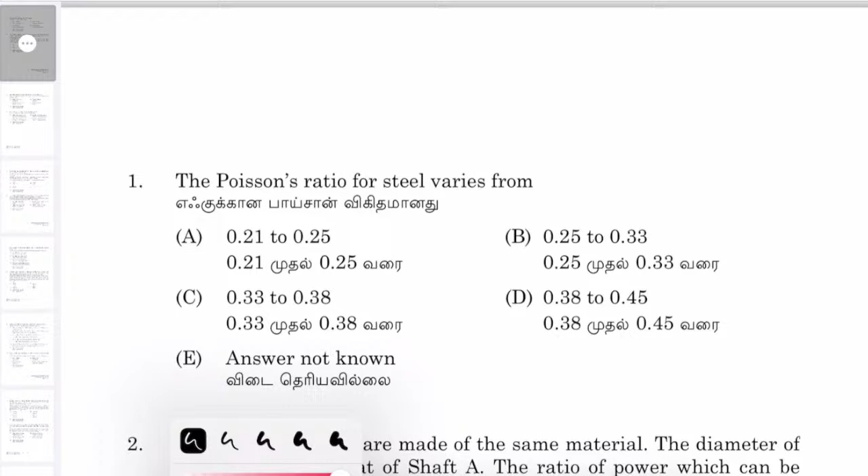So second question, two shafts A and B are made of same material. The diameter of shaft B is twice that of shaft A. The ratio of power which can be transmitted by shaft A to that of shaft B is option C. So third question, maximum principal stress theory is known as option A, Rankine's theory.

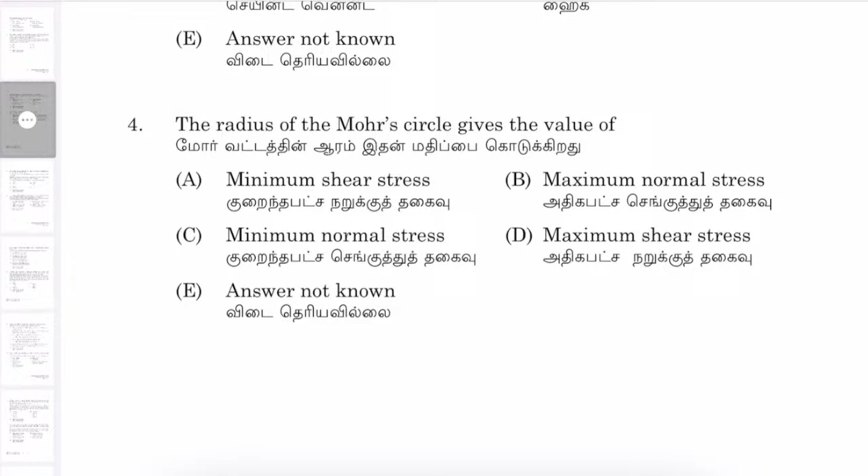So fourth question, the radius of the Mohr circle gives the value of option D, maximum shear stress. So fifth question, the tensile stress in the flywheel rim due to the centrifugal force acting on the rim is given by option D, rho v square.

So sixth one, if a sliding contact bearing is designed for 3 times the minimum value of bearing modulus, then the bearing will operate with option D, thick film lubrication.

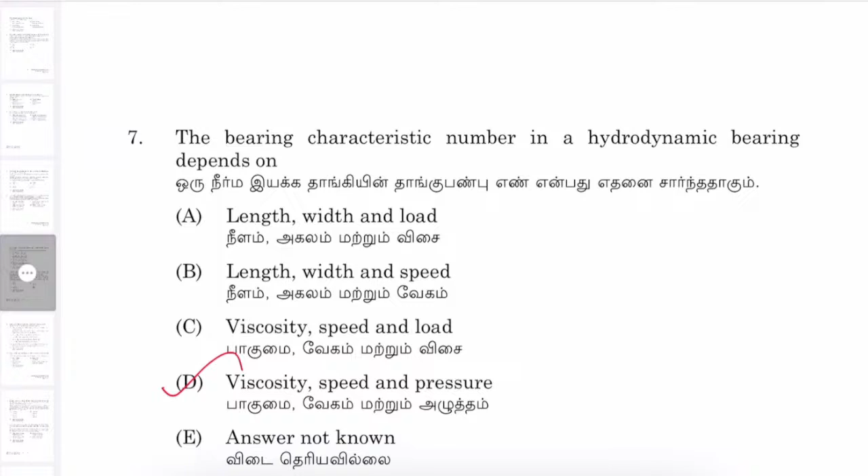So question 7, the bearing characteristics number in a hydrodynamic bearing depends on option D, viscosity, speed and pressure. So eighth question, a double fillet weld joint with parallel fillet weld of length L and leg B is subjected to a tensile force P.

Assuming uniform stress distribution, the shear stress in the weld is given by option C, P divided by root 2 B into L.

So ninth question, which of the following statement is wrong for connecting rod? Option D, the most suitable section for the connecting rod is T section - that is wrong.

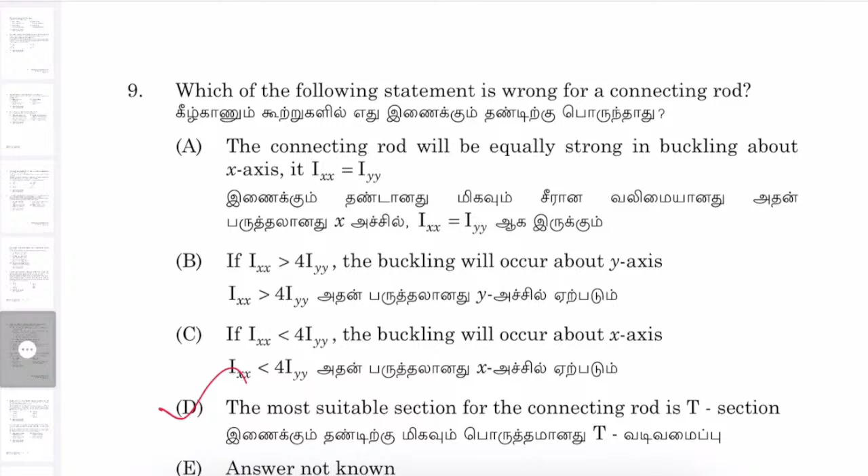So 10th one, when the frictional force helps to apply the brake is said to be option D, partially self-energizing brake. So 11th question, 20-degree full depth involute profile, 19 tooth pinion and 37 tooth gear are in mesh.

If the module is 5 mm, then center distance between the gear pair will be option A, 140 mm. So 12th question, when bevel gears having equal teeth and equal pitch angles connect two shafts whose axes intersect at right angle, then they are known as option D, miter bevel gears.

So 13th one, two threaded bolts A and B of same material and length are subjected to identical tensile load. If the elastic strain energy stored in bolt A is 4 times that of bolt B and the mean diameter of bolt A is 12 mm, the mean diameter of bolt B in mm is option B, 24 - that is the correct answer.

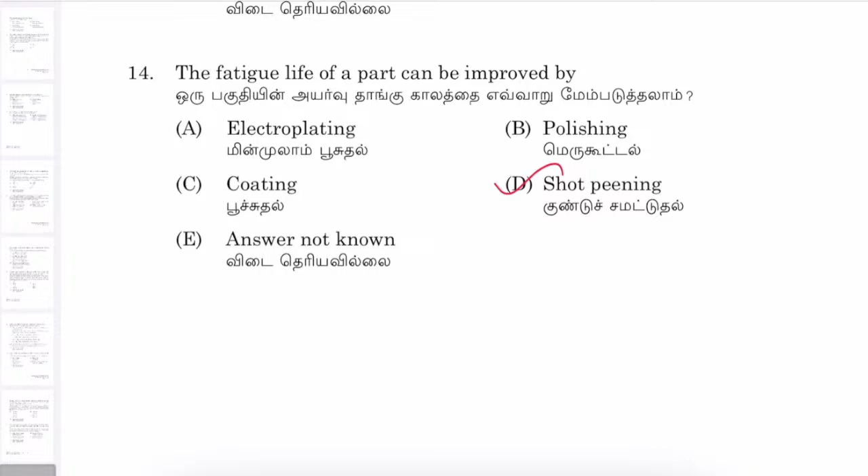So next question, the fatigue life of a part can be improved by option D, shot peening. So next one, Oldham coupling is used to connect two shafts

of option B, which have lateral misalignment. So next question, Euler's formula to calculate buckling load is given by option A, PC is equal to n pi square EI divided by L square.

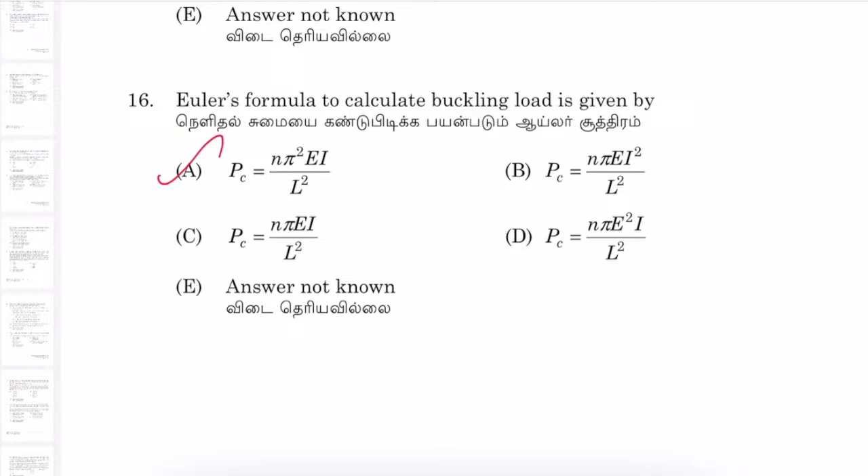So next question, a simply supported beam is subjected to uniformly distributed load in its entire span. The variation of bending moment along the length of the beam is option C, parabola.

So next question, a boiler of 1.6 meter diameter is made of 20 mm thick steel plates. The permissible steam pressure is dash if the longitudinal efficiency and the circumferential efficiency of the joint is 80% and 70% respectively. The maximum tensile stress in the steel plates is not to exceed 80 megapascal. So option B, 1.60 Newton per mm square.

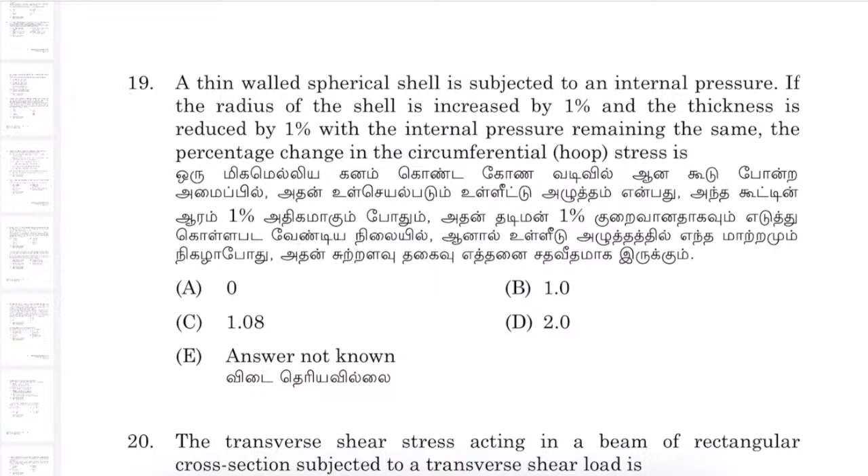So next question, a thin walled spherical shell is subjected to an internal pressure. If the radius of the shell is increased by 1% and the thickness is reduced by 1%, with the internal pressure remaining the same, the percentage change in the circumferential stress is option D, 2.

So next question, the transverse shear stress acting in a beam of rectangular cross section subjected to a transverse shear load, option D, variable with maximum at the neutral axis.

So next question, which statement is correct about unary phase diagram? Option C, pressure plotted on the vertical axis and temperature on the horizontal axis.

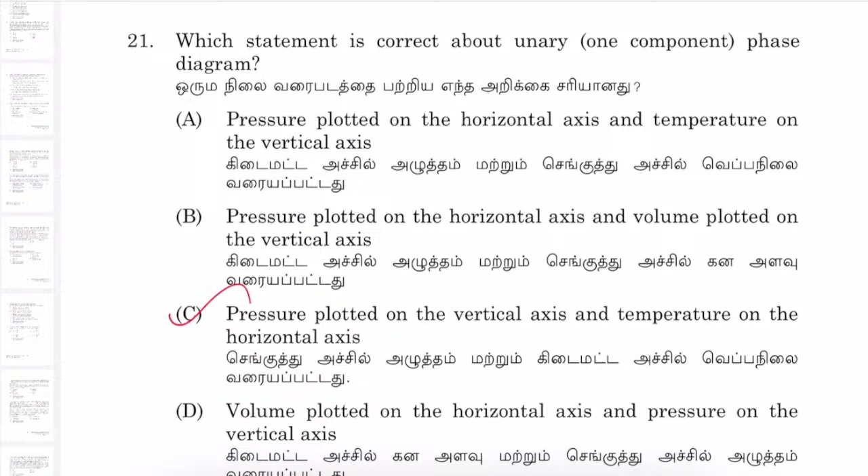So next question, a peritectic reaction occurs during the following process. So option D, solidification of some alloys.

So next question, the critical cooling rate is defined as option A, slowest rate of cooling at which all the austenite is transformed into 100% martensite.

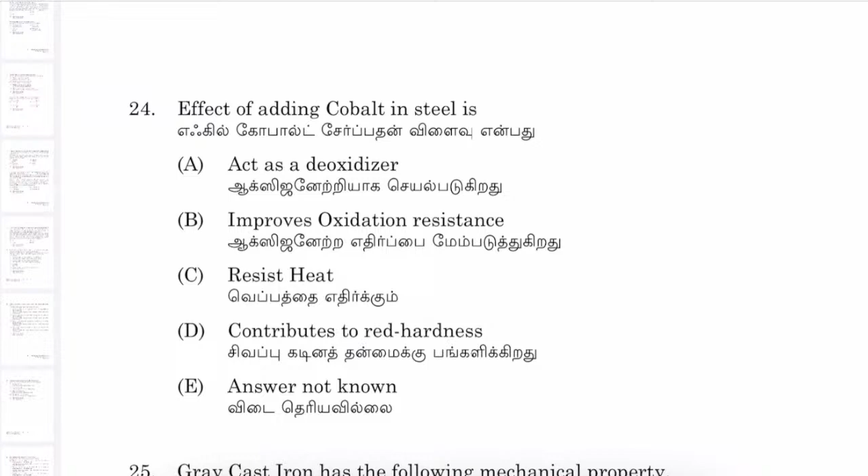So next one, effect of adding cobalt in steel is contributes to red hardness. So next question, gray cast iron has the following mechanical property.

Option B, low tensile strength. 26th question: the purpose of doing tempering treatment is to improve toughness. 27th question: high speed tool steel must possess excellent red hardness and good shock resistance. 28th question: normal crystallographic structure of nickel at all temperatures is FCC, option A.

29th question: which is used as lining material in high temperature furnaces? Option B, alumina. 30th question: which one of the following is a polymeric material? Option A, starch.

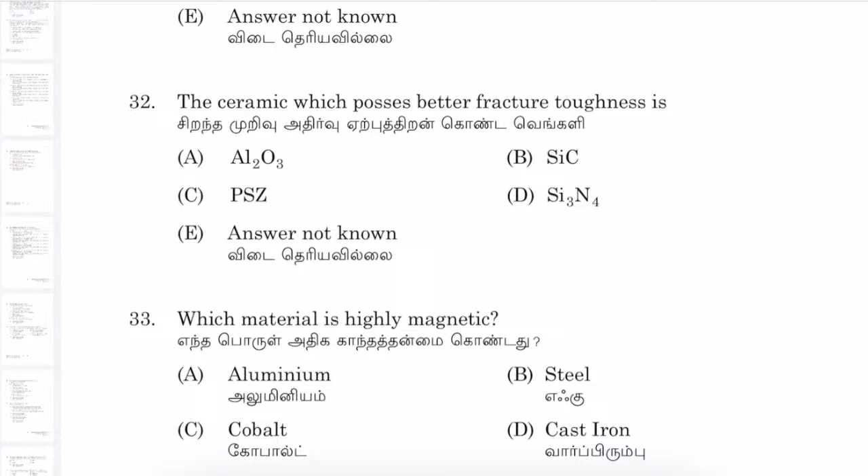31st question: which of the following is agglomerated structure? Option B, concrete. The ceramic which possesses better fracture toughness is option C, PSZ.

33rd question: which material is highly magnetic? Option C, cobalt.

34th question: an ion displaced from the lattice into an interstitial site is called option D, Frenkel defect. 35th question: zero dimensional imperfection is also called option D, point imperfection.

36th question: in particle strengthened system the particle size is usually option A, less than 0.1 micrometer.

37th question: which of the following is not an advantage of powder metallurgy? Option D, low production rate, is the wrong/incorrect statement.

38th question: in the stress strain curve the transition occurs at a point referred as option B, proportional limit. 39th question: the ability of a material to plastically deform in compression without fracture is referred as option D, malleability.

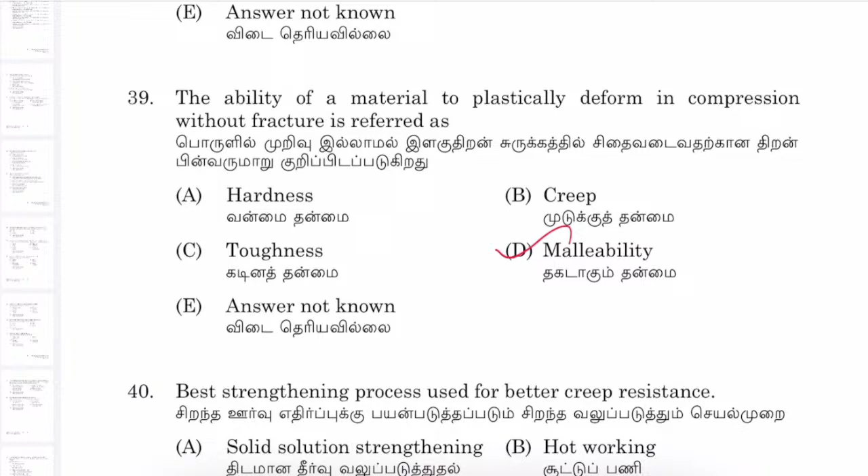40th question: best strengthening process used for better creep resistance? Option D, precipitation strengthening.

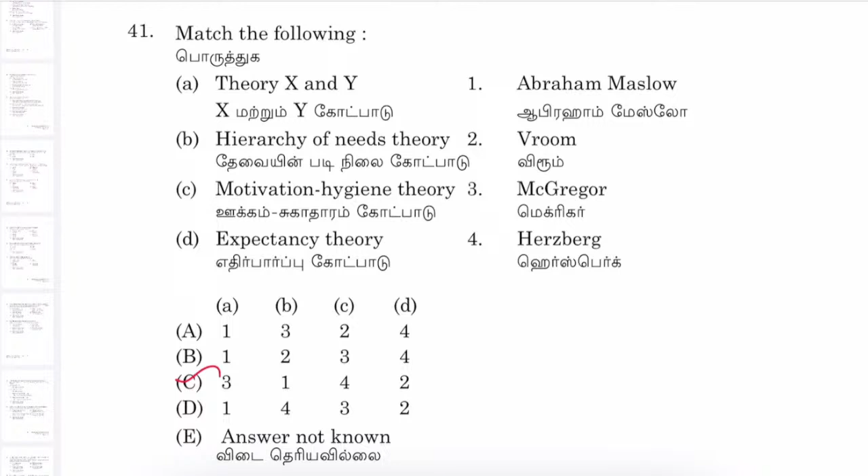42nd question: select the correct leadership styles. They mentioned laissez-faire, democratic, authoritarian, and symptomatic diagnosis. For us it will be laissez-faire, democratic and authoritarian, so option B is correct.

43rd question: the following personal protective devices can be used by the operator to protect the face during welding. The answer for 43 is option A.

44th question: a foreman or supervisor is a vital link between option B, management and worker. 45th question: which of the following is not associated with CPM? Option C, it uses probabilistic times.

46th question: in a CPM network the critical path is option C, shortest path.

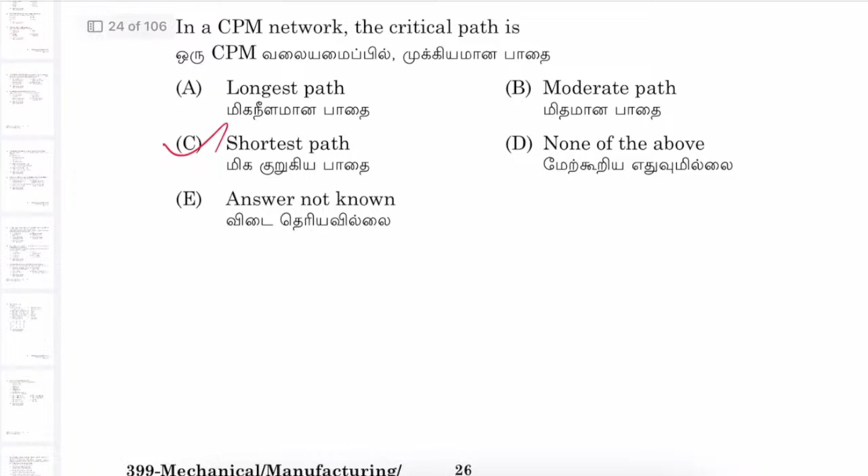47th question: the number of basic variables of the general transportation problem with m sources and n destinations is feasible if the number of allocations are... the answer is option D, m plus n minus 1.

48th question: if there are n workers and n jobs there would be a dash solution. The answer is option B, n factorial.

49th question: inventory carrying cost can be computed by option D, average inventory into cost per item into cost of carrying inventory in percent per period.

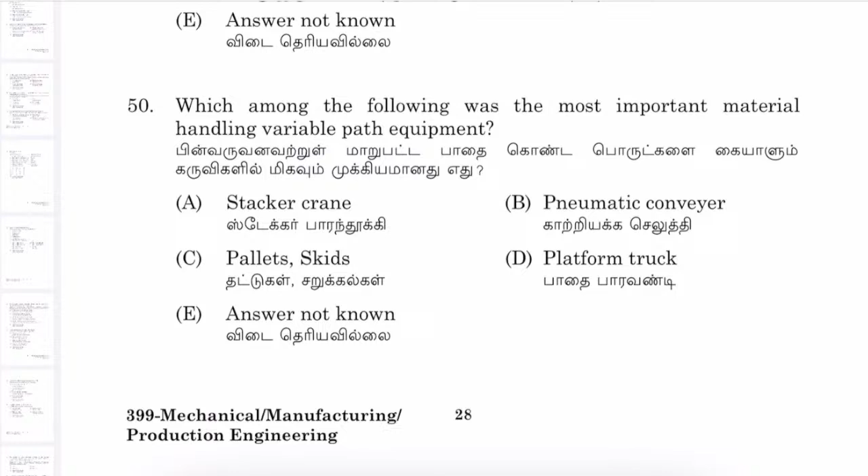50th question: which among the following was the most important material handling variable path equipment? The answer is option D, platform truck.

51st question: in ABC analysis the C items are those which represent option A, 5 to 10% total expenditure on materials.

52nd question: the material handling equipment that can be used to transfer material from one place to another place along the beam attached to the ceiling. The option is option B, monorail.

53rd question: which of the following is not considered a contingency allowance? Option B, checking the machine setting.

54th question: which study is concerned with the recording, analysis and critical examination of existing and proposed ways of doing work? Option C, method study.

55th question: in time study the formula to determine the number of cycles, what is the precision interval level in percent? The answer for 55 is option B, 1/4.

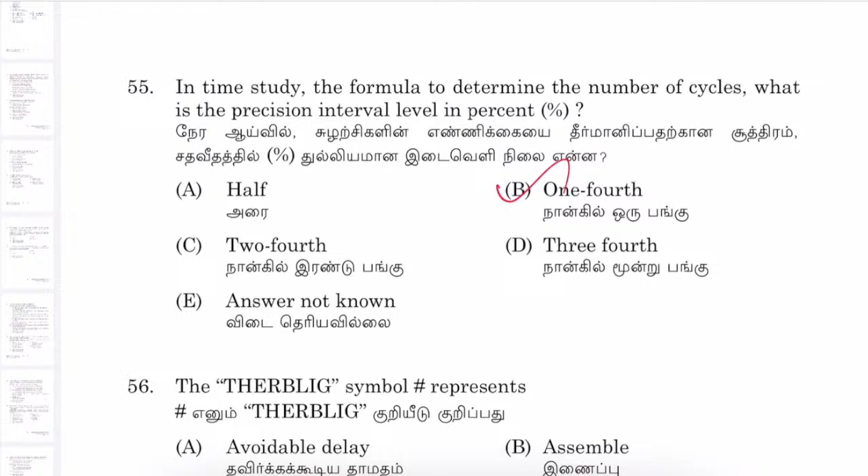56th question: the THERBLIG symbol hash represents option D, position.

57th question: unit of command is followed in which one of the organization? Option A, line organization.

58th question: which of the following skills are most important in human relations? Option B: leadership skills, motivating skills and communicating skills.

59th question: a manufacturer of motorcycles buys side box at rupees 240 each. If he manufactures it, the fixed and variable cost would be rupees 3 lakh and rupees 90 per side box respectively. If there is a demand for 2500 side boxes, the break even point is option A, 2000.

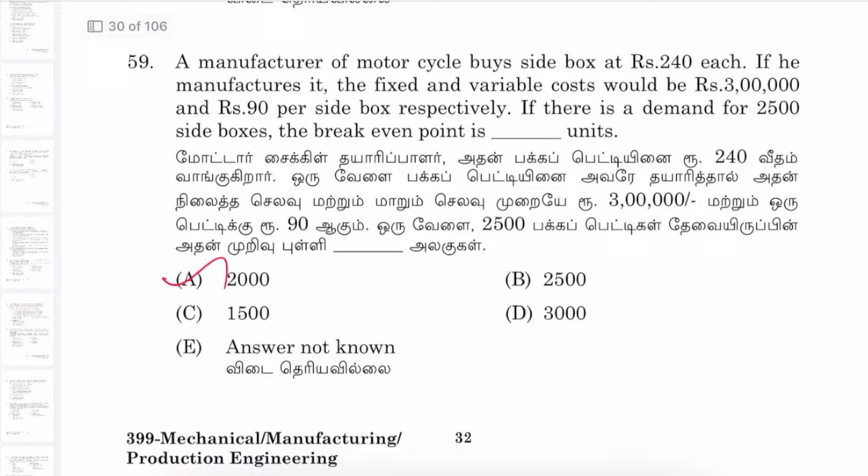60th question: according to Henry Fayol, the principles of management are option D, that is division of work, authority and responsibility, and remuneration.

61st question: for a pitot tube the stagnation pressure head is 6.8 meter, the static pressure head is 5 meter, CV is equal to 0.9 and g is equal to 10 meter per second square. Calculate the velocity and select the right option. The answer for 61 is option B, 10.49 meter per second.

62nd question: flow of water in a pipe having diameter above 3 meters can be measured by option C, Venturi meter.

63rd question: the ratio of forces exerted by water jet when it is made to strike a stationary flat plate held normal to it, and a flat plate moving in the direction of jet at 1/3 the velocity of jet, would be option B, 9:4.

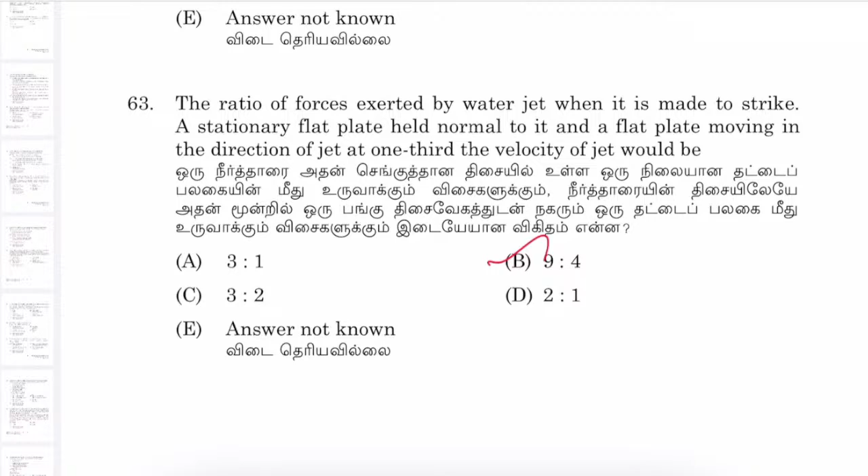64th question: efficiency of the jet of water having velocity v striking a series of vertical plates moving with velocity u is given by option B, 2u into (v minus u) divided by v square.

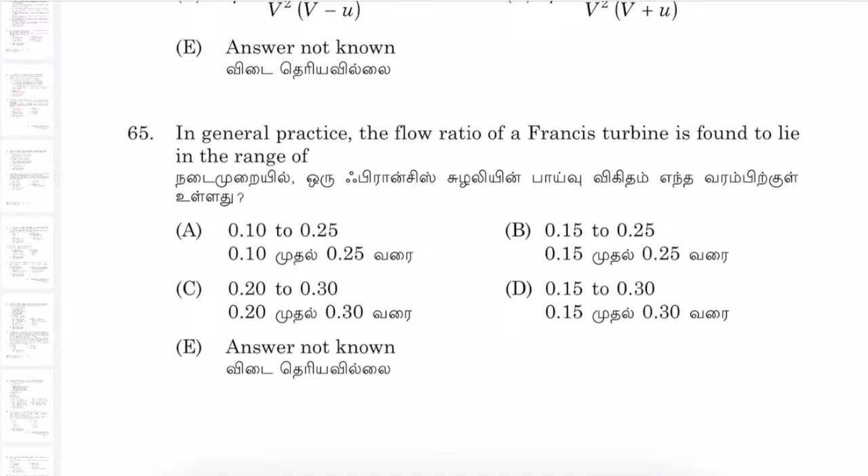65th question: in general practice the flow ratio of a Francis turbine is found to lie in the range of option D, 0.15 to 0.30.

66th question: the degree of reaction of a Kaplan turbine, option B, greater than 0 but less than 1/2.

67th question: water hammer in pipes is due to option C, sudden stoppage of flow by the closure of valve.

68th question: the modern Francis turbine is essentially option B, a mixed flow turbine.

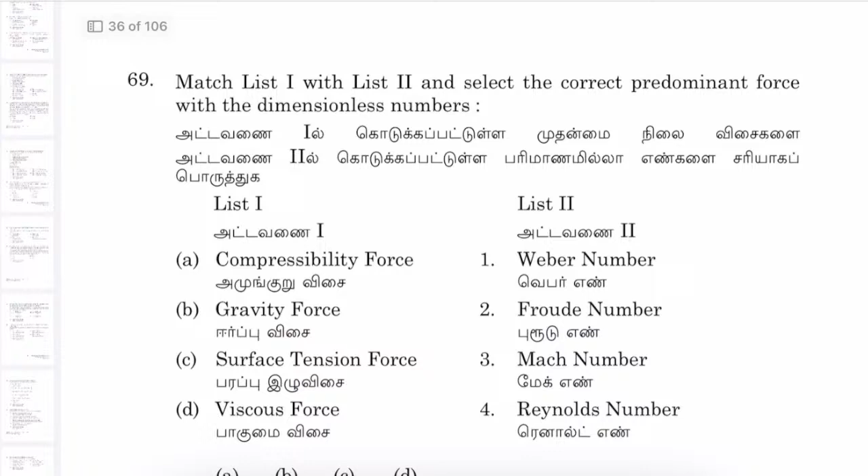Which of the following is not a dimensionless number? Option C, Manning's coefficient.

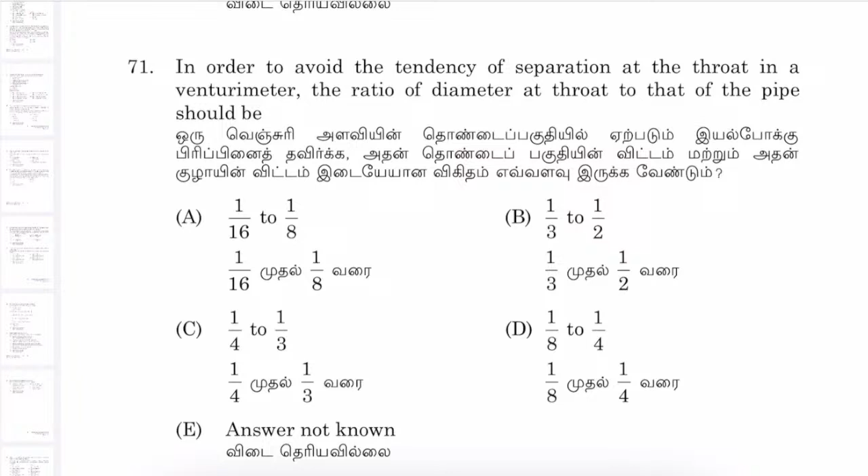71st question: in order to avoid the tendency of separation at the throat in a venturimeter, the ratio of diameter at throat to that of pipe should be option B, 1/3 to 1/2.

73rd question: loss of head due to sudden expansion of flow stream in a closed conduit is expressed by option A, (V1 minus V2) the whole square divided by 2G.

74th question: if H is the total head at inlet and HF is the head lost due to friction, efficiency of power transmission through a straight pipe is given by option A, (H minus HF) divided by H.

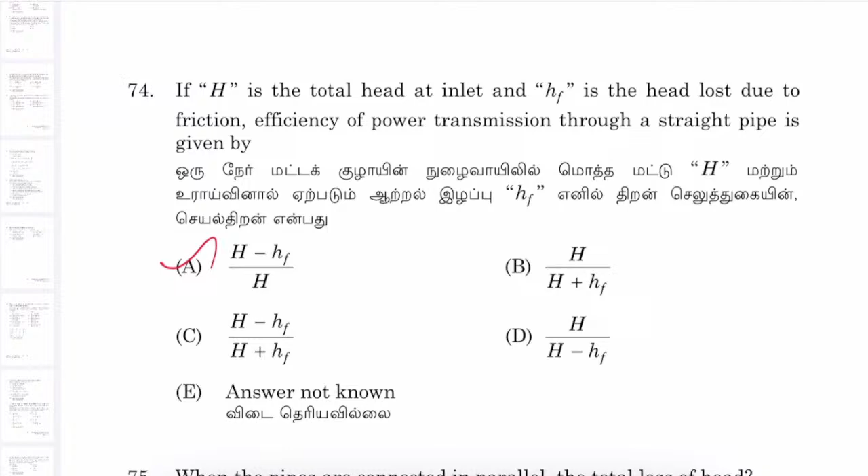75th question: when the pipes are connected in parallel, the total loss of head, option B, is same as in each pipe.

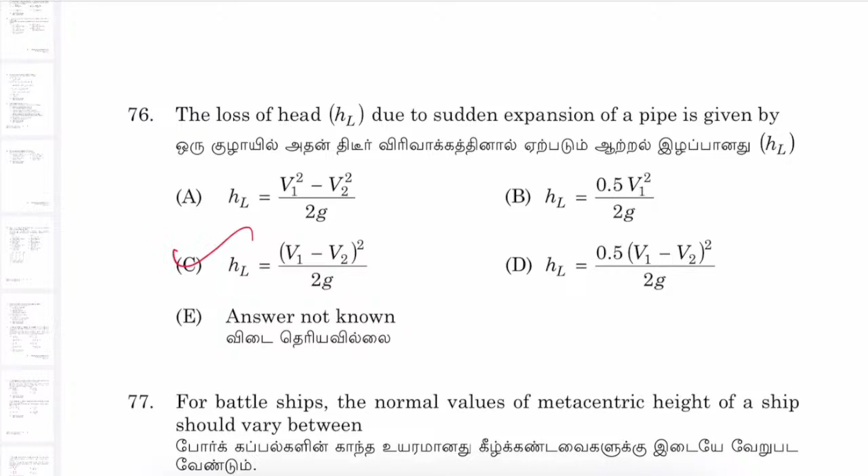76th question: the loss of head due to sudden expansion of pipe is given by option C, (V1 minus V2) the whole square divided by 2G.

For a battleship, the normal values of metacentric height of ship should vary between option C, 1 to 1.5 meter.

78th question: a metallic piece weighs 80 Newton in air and 60 Newton in water. The relative density of the metal would be option C, 4.

79th question: the least radius of gyration of a ship is 9 meter and the metacentric height is 0.75 meter. The time period of oscillation of the ship is option B, 20.85 seconds.

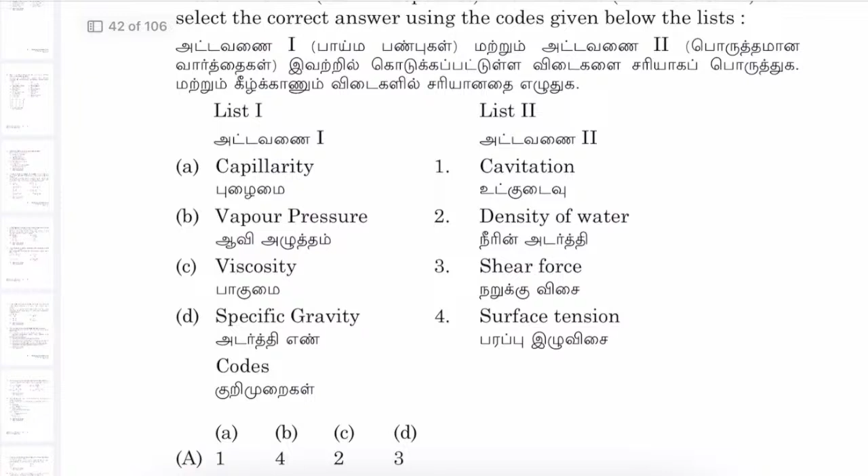81st question: arc blow in manual metal arc welding is caused by option B, the use of DC welding with consumable electrodes. 82nd question: it is the angle between the tool face and a line parallel to the base of the tool and measured in a plane perpendicular to the base and the side cutting edge.

Option D, back and side rake angle.

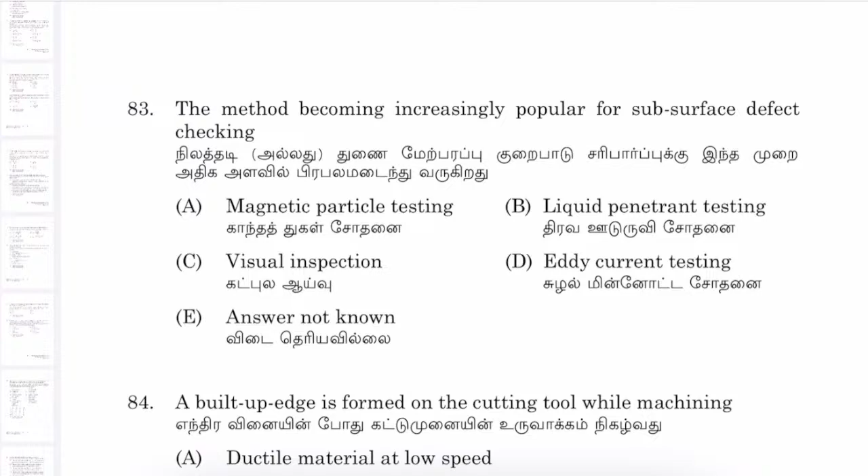83rd question: the method becoming increasingly popular for subsurface defect checking. Option D, eddy current testing.

84th question: a built-up edge is formed on the cutting tool while machining. Option A, ductile material at low speed.

85th question: riser is used in a sand casting to reduce shrinkage cavities.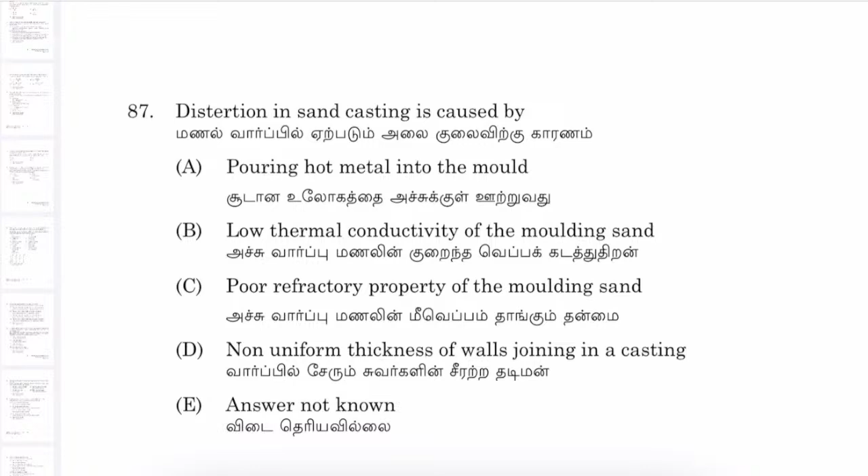86th question: aluminum is used as a pattern material for making the master pattern because of aluminum's option B, low cost. 87th question: distortion in sand casting is caused by option D, non-uniform thickness of walls joining in a casting.

88th question: strength of molding sand is increased with fine grain size of the sand.

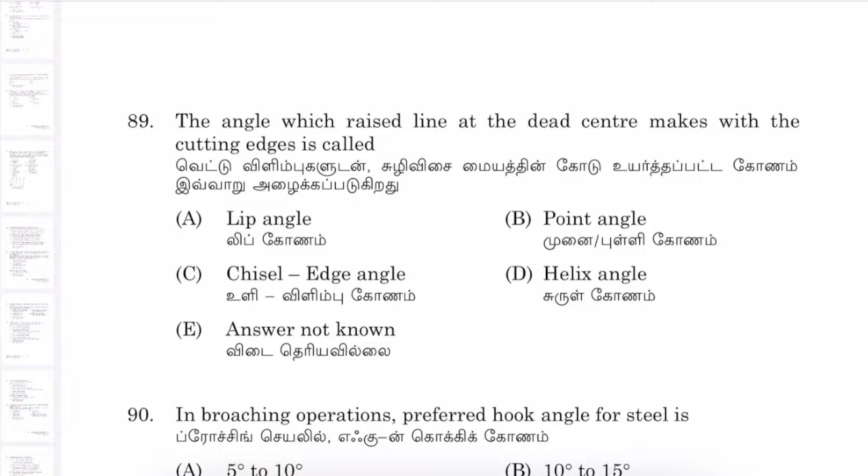89th question: the angle which raised line at the dead center makes with the cutting edges is called option B, point angle. In broaching operation, preferred hook angle for steel is option C, 15 degree to 20 degree.

91st question: the helix angle of most of the drill is option A, 30 degree.

92nd question: the work is mounted with its axis horizontal and the cutter slides carried on a saddle that moves vertically downwards as cutting procedure is called option C, gear shaping process.

93rd question: in chemical machining process, which of the following is used to remove the material? Option D, etchant.

94th question: the computer program is a previously prepared deck of option B, punched cards.

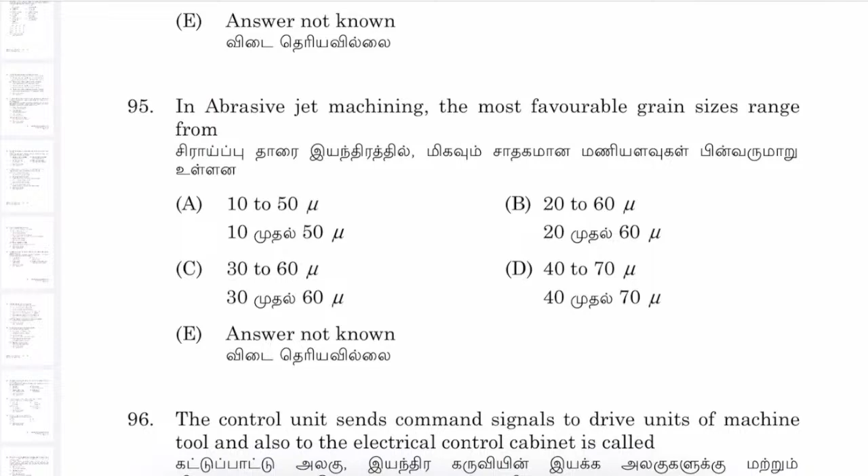95th question: in abrasive jet machining, the most favorable grain size range is option A, 10 to 50 mu.

96th question: the control unit sends command signals to drive units of machine tools and also to the electrical control cabinet, called option D, machine control unit.

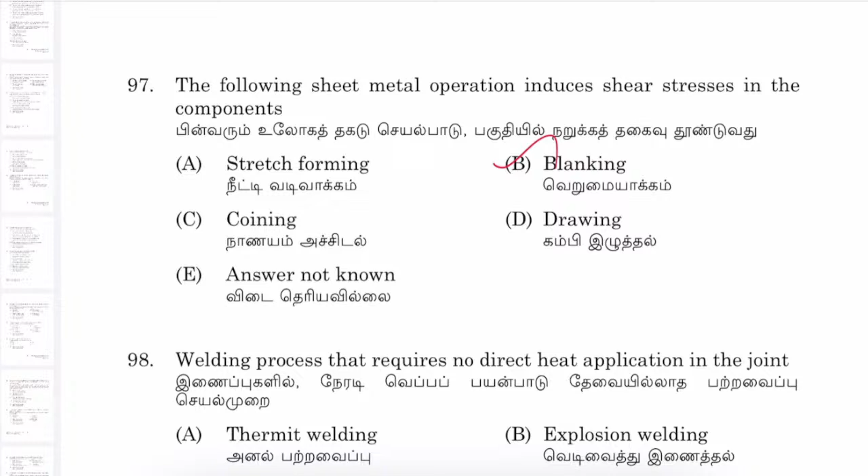97th question: the following sheet metal operation induces shear stresses in the components, option B, blanking. 98th question: welding process that requires no direct heat application in the joint.

Option C, friction welding.

99th question: the welding process preferred to deposit higher rate of weld metal is option C, submerged arc welding.

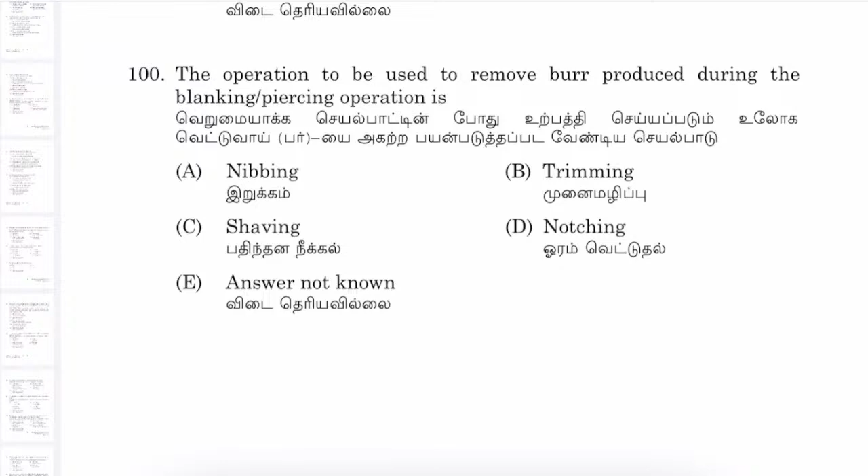100th question: the operation to be used to remove burr produced during the blanking or piercing operation is option C, shaving.

101st question: what happens to the concentrations of reactants and products at equilibrium? Option C, reactants and products remain constant.

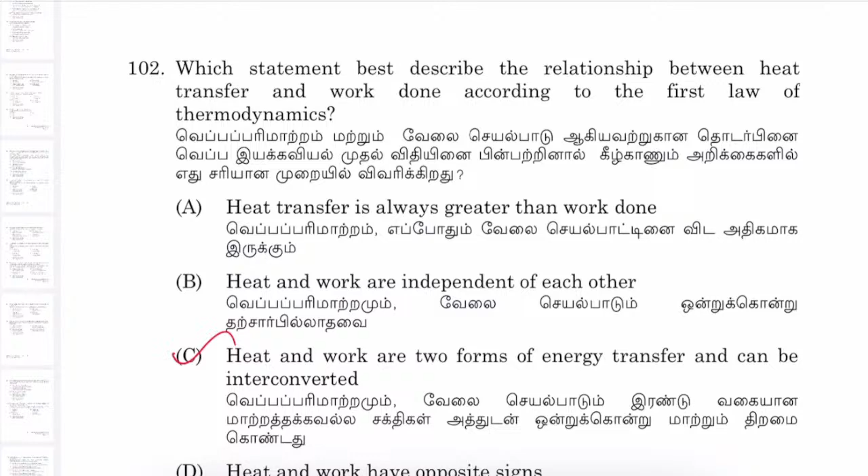102nd question: which statement best describes the relationship between heat transfer and work done according to the first law of thermodynamics? Option C, heat and work are two forms of energy transfer and can be interconverted.

103rd question: the equation applicable to an isothermal process is option A, Q minus W is equal to 0.

104th question: Kelvin Planck's law deals with option B, conversion of heat into work.

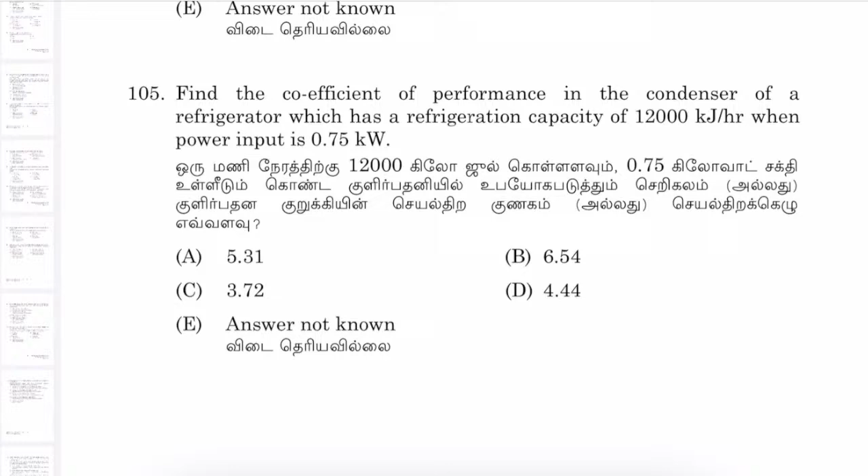105th question: find the coefficient of performance in the condenser of a refrigerator which has a refrigeration capacity of 12,000 kilojoule per hour when power input is 0.75 kilowatt. Option D, 4.44.

106th question: under what condition does a gas exhibit an inversion temperature during Joule-Thomson expansion? Option C, when its initial temperature is low and pressure is high.

107th question: the molecular mass of a gas is 30. Its characteristic gas constant in kilojoule per kilogram Kelvin is option D, 0.277.

108th question: in Carnot cycle, the process is carried out at extremely slow speed in option D: 1, 2, 3 - isothermal compression, adiabatic compression, and adiabatic expansion.

109th question: compared to other types of coal, how does anthracite fuel rank in terms of carbon content? Option C, it has the highest carbon content.

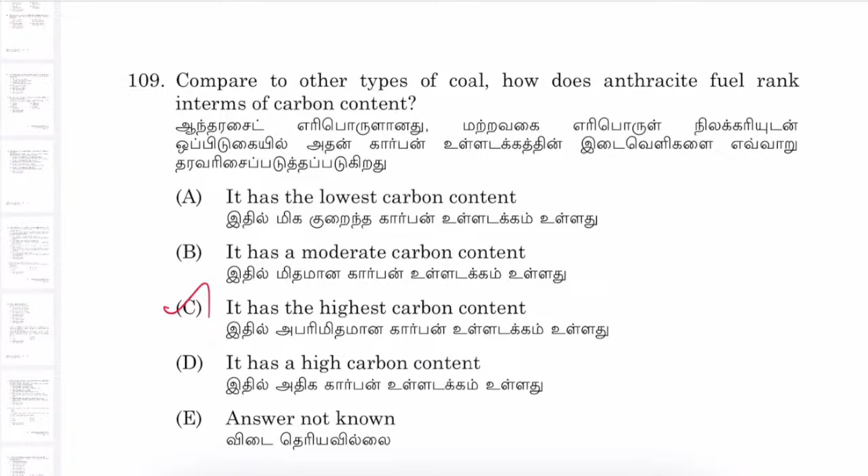110th question: which statement best describes the shape of the blade in a Darrieus type of wind turbine? Option C, curved like a half cylinder resembling an egg beater.

111th question: volumetric efficiency is a measure of option D, breathing capacity of the engine.

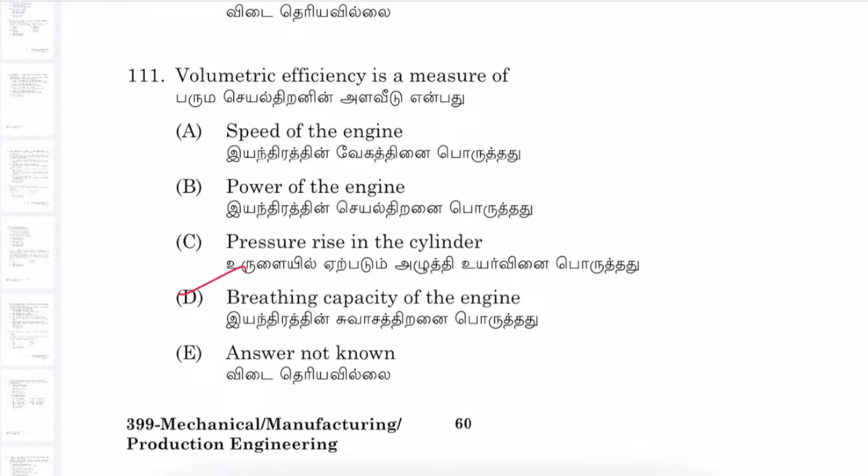112th question: the thermal efficiency of an air standard Brayton cycle in terms of pressure ratio Rp and gamma, equal to Cp by Cv, is given by option D: 1 minus 1 divided by Rp power gamma minus 1 divided by gamma.

113th question: what is the purpose of the reheat cycle in a steam power plant? Option D, to increase the efficiency of the plant by reheating the steam before it enters the turbine.

114th question: a diesel engine has a compression ratio of 15 and heat addition at constant pressure takes place at 6% of stroke. Find the cutoff ratio of the engine. Take gamma equal to 1.4. Option C, 1.84.

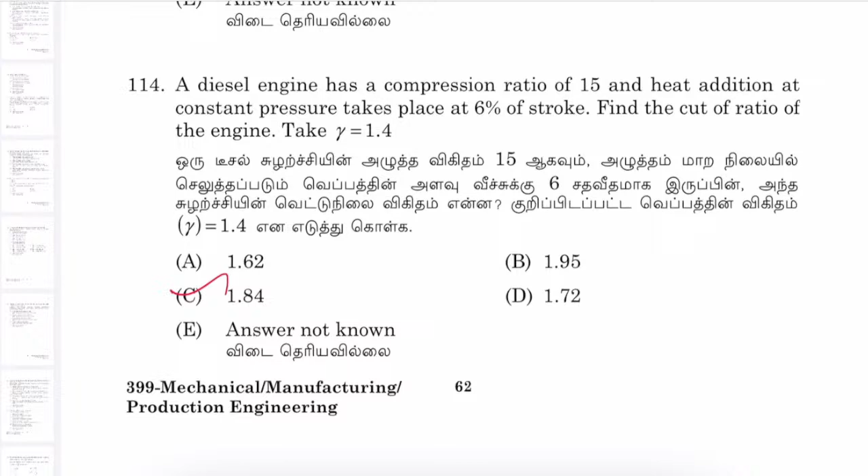115th question: in the operation of steam engines, the vapor cycle adopted is option B, Rankine cycle. For an Otto cycle, the increase in compression ratio leads to option D, an increase in thermal efficiency and mean effective pressure.

117th question: the capacity of the refrigerator is 280 tons when operating between minus 10 degrees Celsius and 25 degrees Celsius. Determine the quantity of ice produced within 24 hours when water is supplied at 20 degrees Celsius. Option B, 224.75 tons.

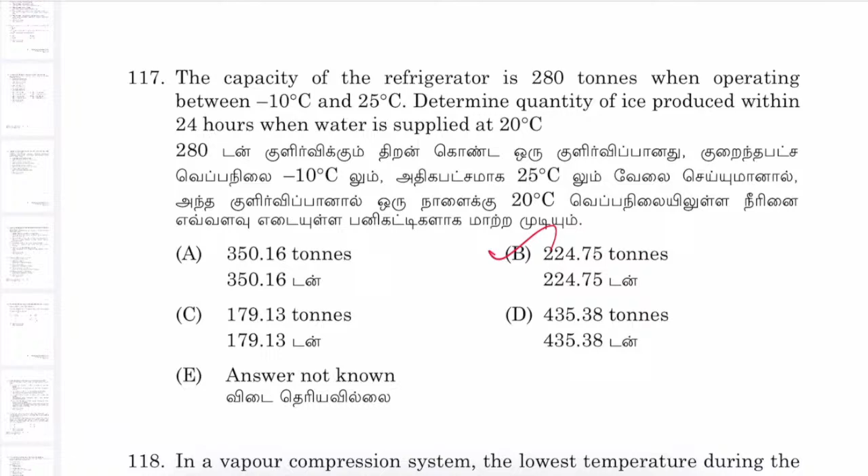118th question: in a vapor compression system, the lowest temperature during the cycle occurs after expansion. Answer C.

119th question: the difference between dry bulb temperature and wet bulb temperature is called option B, wet bulb depression.

120th question: a moist air sample has dry bulb temperature at 30 degrees Celsius and specific humidity of 11.5 gram water vapor per kilogram dry air. Assume molecular weight of air as 28.93. If the saturation vapor pressure of water at 30 degrees Celsius is 4.24 kilopascal and the total pressure is 90 kilopascal, then relative humidity of the air sample is option B, 38.5.

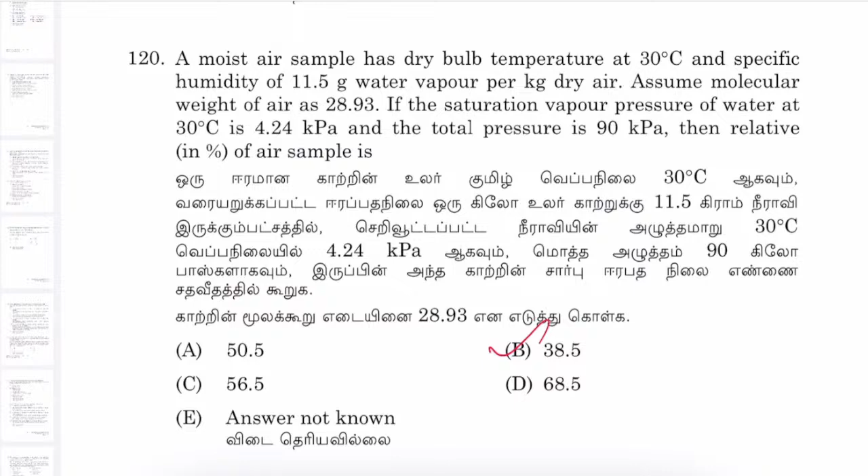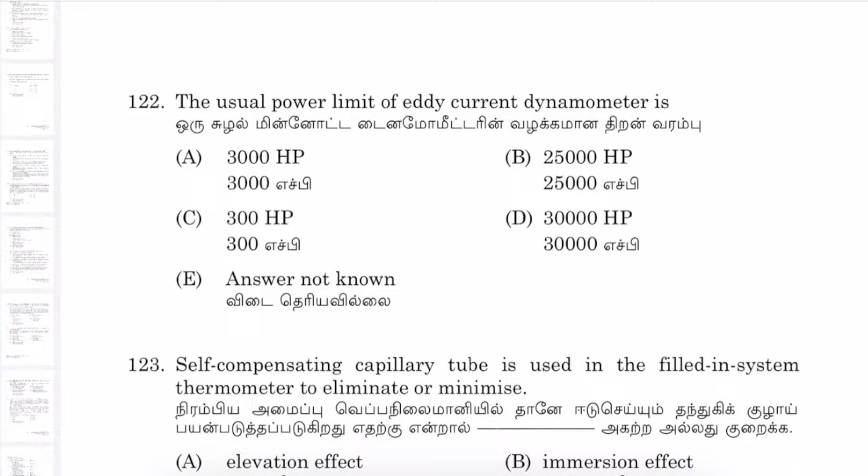122nd question: the usual power limit of eddy current dynamometer is option A, 3000 horsepower.

123rd question: self compensating capillary tube is used in the filled-in system thermometer to eliminate or minimize option B, immersion effect.

124th question: the variable head flow meters can be used for the measurement of flow of option B, liquid, gases and slurries.

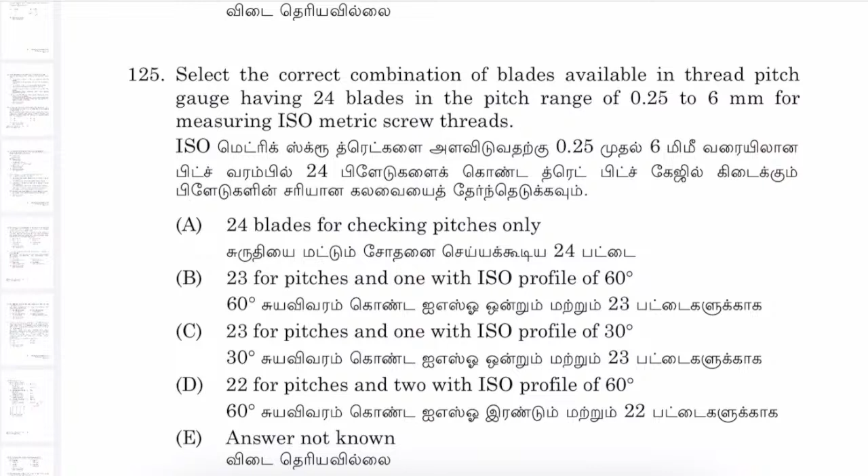125th question: select the correct combination of blades available in a thread pitch gauge having 24 blades in the pitch range of 0.25 to 6 mm for measuring ISO metric screw threads. Option B: 23 pitches and 1 with ISO profile of 60 degrees.

126th question: identify the instrument that uses color of light due to interference caused by diffraction of light in the gap for checking the straightness of a surface. Option B: autocollimator.

127th question: identify the instrument that is used for measuring the surface finish of a machined part using surface inspection by comparison method. Option A: profilometer.

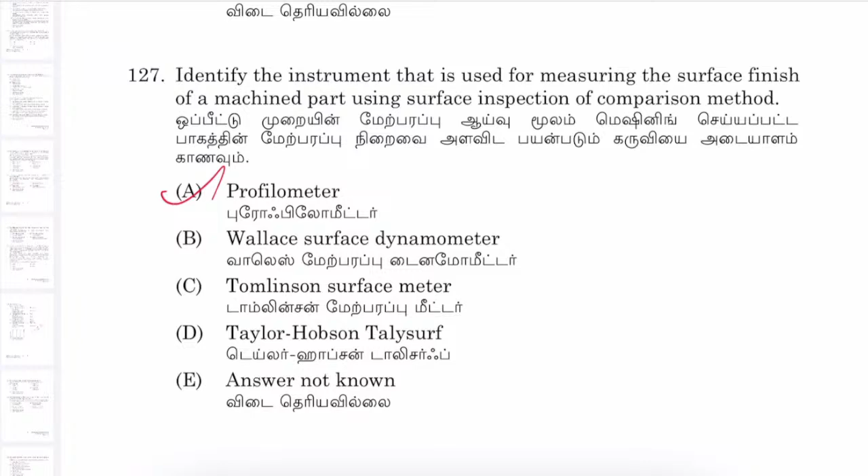128th question: the method that is excellent for checking the flatness of small lapped surfaces such as micrometer anvils and block gauges. Option B: flatness comparators.

129th question: which of the following represents the type of fit for a hole and shaft pair given that hole equals 50 mm and shaft equals 50 mm. Option D: interference fit.

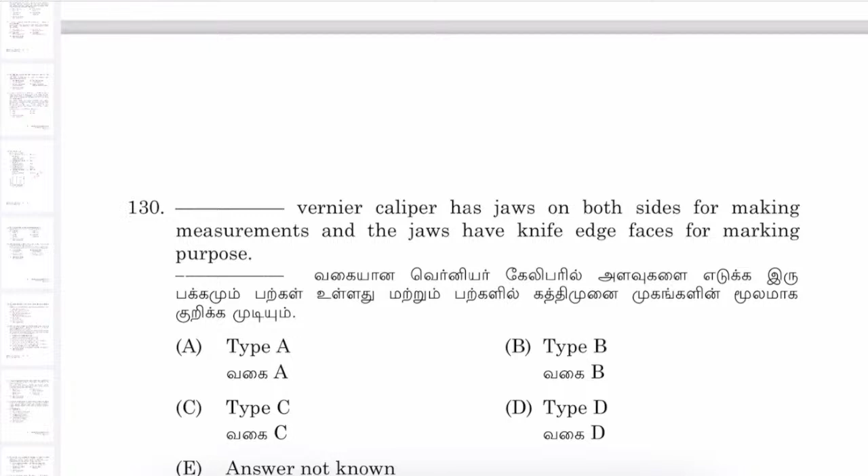131st question: an optical flat can be employed to measure height differences in the range of option A: 0.01 to 0.1 mm.

132nd question: in an angular measurement of a taper block using a sine bar, the difference of height is 100 mm and the center distance between the rollers is 200 mm. The taper angle is option A: 30 degrees.

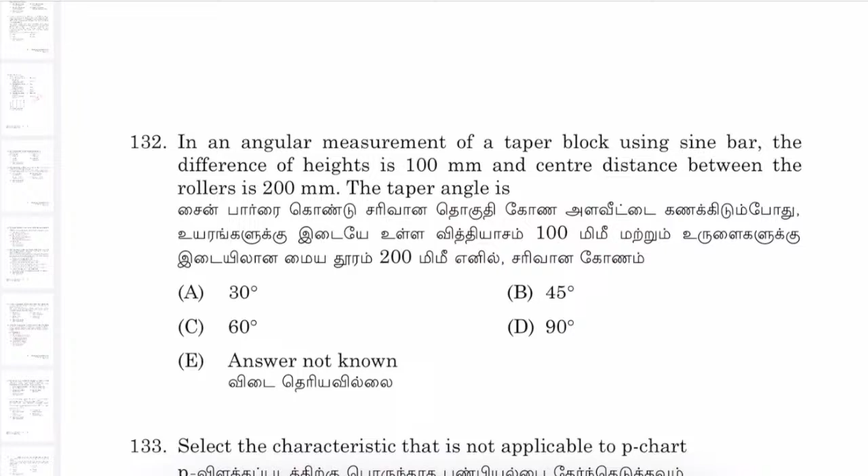133rd question: select the characteristic that is not applicable to a P chart. Option D: more sensitive in detecting a shift in the process.

134th question: when plus or minus 3 sigma limits are used on a control chart, even if the process is in full control, there is a probability that a point on the control chart may fall outside the control limits. Option C: 0.27%.

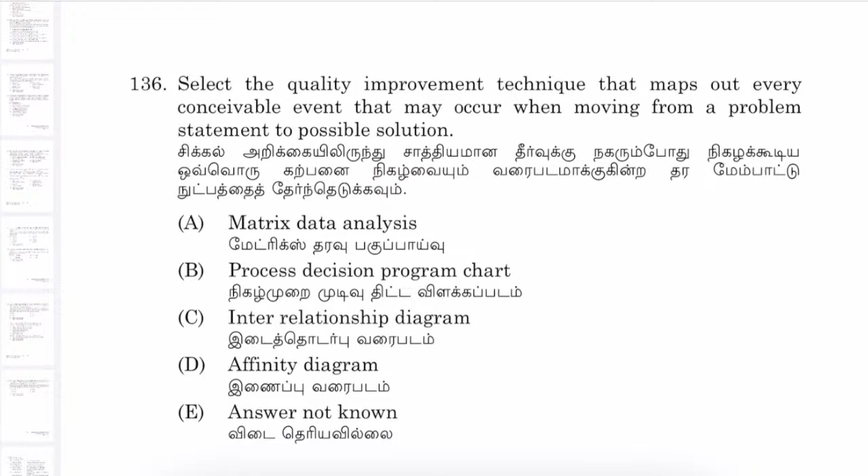137th question: CMM enables the location of point coordinates in option A: 3D space.

138th question: which of the following commands does not belong to the measurement function library of a CMM. Option D: formatting.

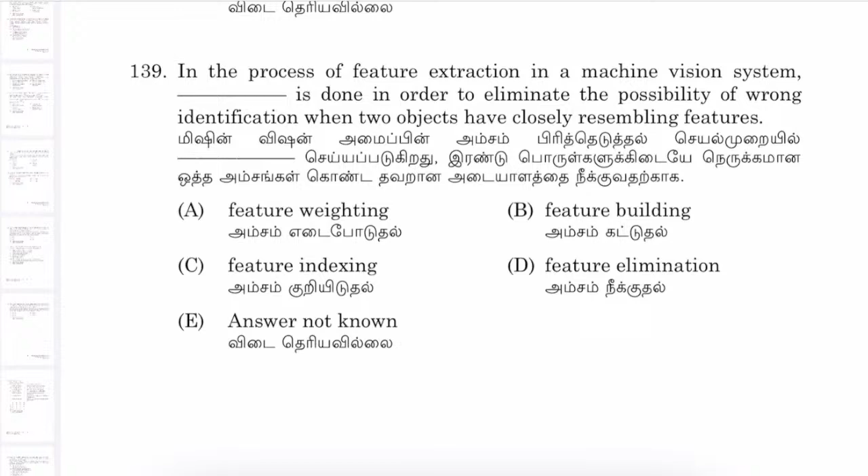In the process of feature extraction in a machine vision system, this is done in order to eliminate the possibility of wrong identification when two objects have closely resembling features. Option A: feature weighting.

140th question: which of the following elements is not a major element of a coordinate measuring machine. Option C: computer aided quality control.

Which of the following elements is not associated with computer integrated manufacturing? Option D: failure mode and effects analysis.

142nd question: what is meant by FMS? Option B: flexible manufacturing system.

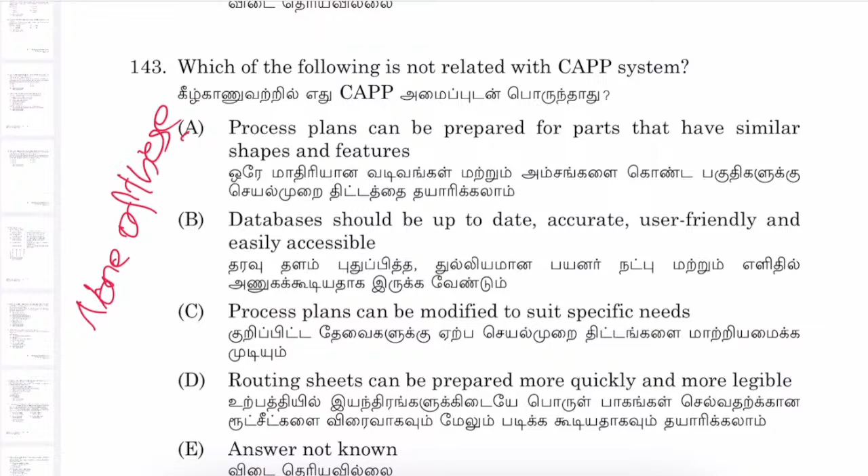144th question: the application layer of a network, option A: consists of software being run on the computer connected to the network.

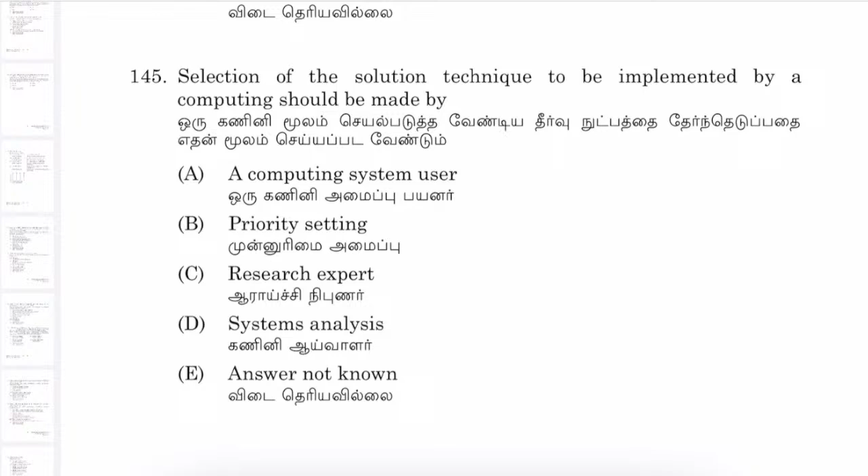145th question: selection of the solution technique to be implemented by a computing should be made by option A: a computing system user.

146th question: computer input device and storage device. Option A: keyboard and hard disk.

147th question: where does a computer add and compare data? Option B: CPU chip.

148th question: which of the following is not related with geometric modeling? Option B: cutting tool.

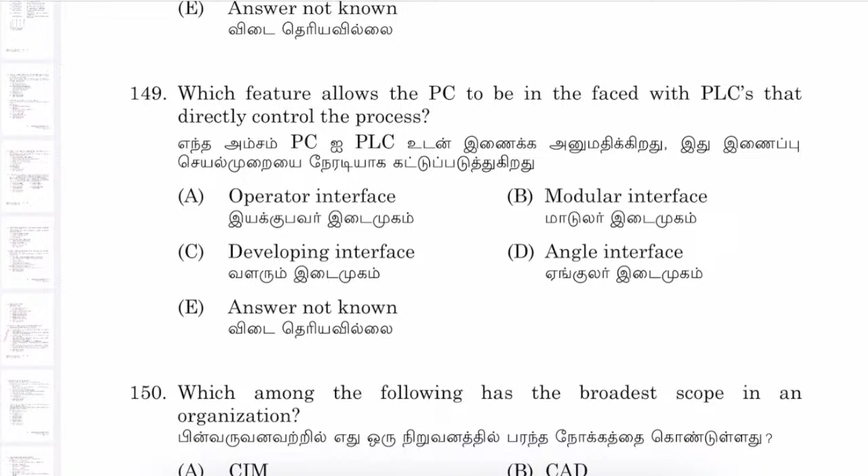149th question: which feature allows the PC to be interfaced with PLCs that directly control the process? Option A: operator interface. 150th question: which among the following has the broadcast scope in an organization?

150th question: which among the following has the broadest scope in an organization? Option A: CIM.

151st question: which of the following is not correct in respect of manufacturing attributes? Option D: production volume and production rate.

152nd question: what is the abbreviation for AGC? Option A: automated guided cart.

153rd question: computer aided drafting systems are used for option D: drawing and scaling the object.

154th question: which of the following quantities is a vector quantity? Option A: weight.

155th question: choose the design and manufacturing attribute. Option D: part design.

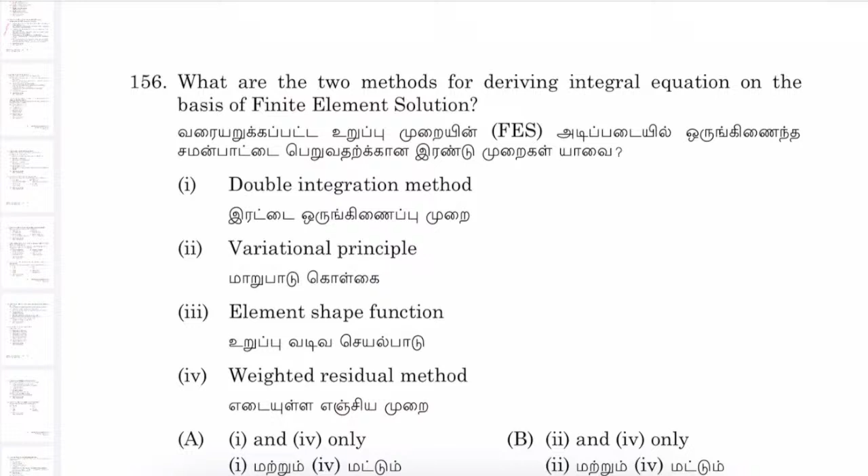156th question: what are the two methods for deriving the integral equation on the basis of finite element solution? Option B is the correct answer: variational principle and weighted residual method.

157th question: quickly responding to changes in product demand and customer needs is considered an important element in option B: agile manufacturing.

158th question. Which of the following statements are true in online programming languages for robots should support? Option C, the identification of objects or position using a vision system.

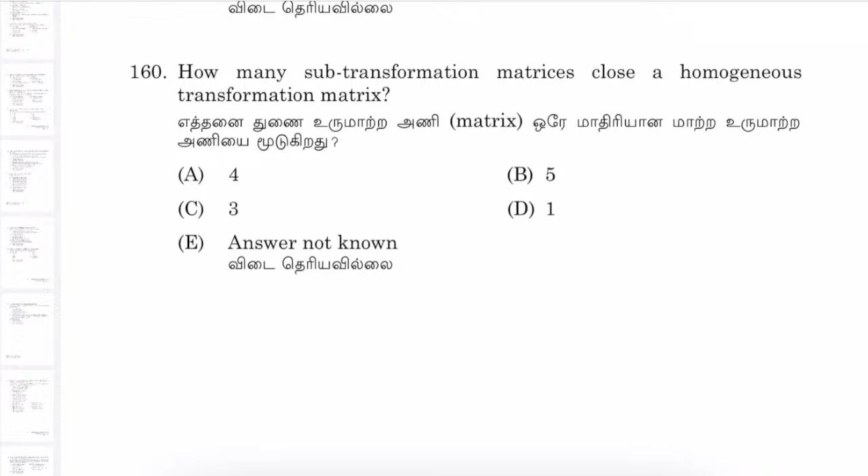161th question. In spring controlled governor, the controlling force curve is a straight line. When the balls are 200 mm apart, the controlling force is 1000 Newton, and when 100 mm apart, the controlling force is 400 Newton. What is the value of controlling force when the balls are 400 mm apart? Option C, 2200 Newton.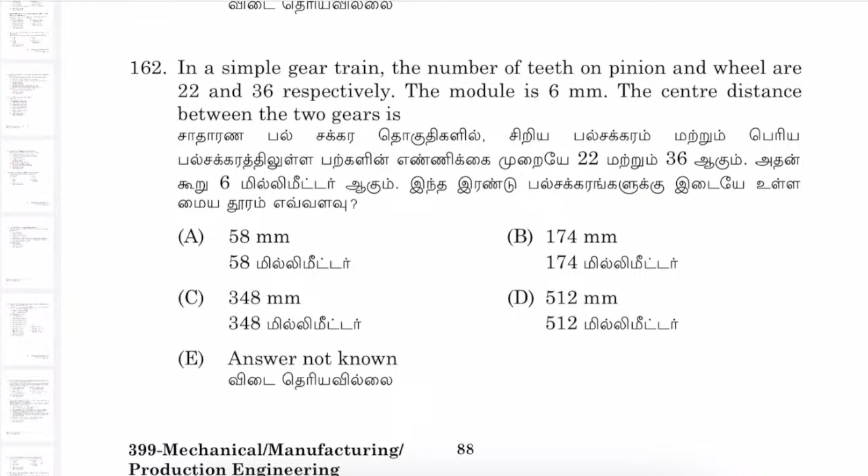162nd question. In a simple gear train, the number of teeth on pinion and wheel are 22 and 36 respectively. The module is 6 mm. The center distance between the two gears is option B, 174 mm.

163rd question. The gear train found in clocks to connect hour hand to minute hand is option C, reverted gear train.

164th question. A disc is spinning at the rate of 20 radian per second about its axis. If the mass moment of inertia of the disc is 1 kilogram meter square and a torque of 100 Newton meter is applied about an axis normal to its angular velocity, the angular velocity of precession for the stability of the disc is option B, 5 radian per second.

165th question. Which one of the following statements is incorrect? Option B, power transmitted by V-belt drive is lower than flat belt drive for the same condition.

166th question. A multi-plate disc clutch has 5 discs on the driving shaft and 3 discs on the driven shaft. The number of active friction surfaces is option D, 7.

167th question. The maximum secondary unbalanced force is dash times the maximum primary unbalanced force. Option B, 1 by n.

168th question. The mass moment of inertia of a binary link is 2 kgm² and it's accelerating at the rate of 10 radian per second square. If the inertia force acting on the link is 100 Newton, then the point of application of inertia force from its center of mass is option A, 0.2 meter.

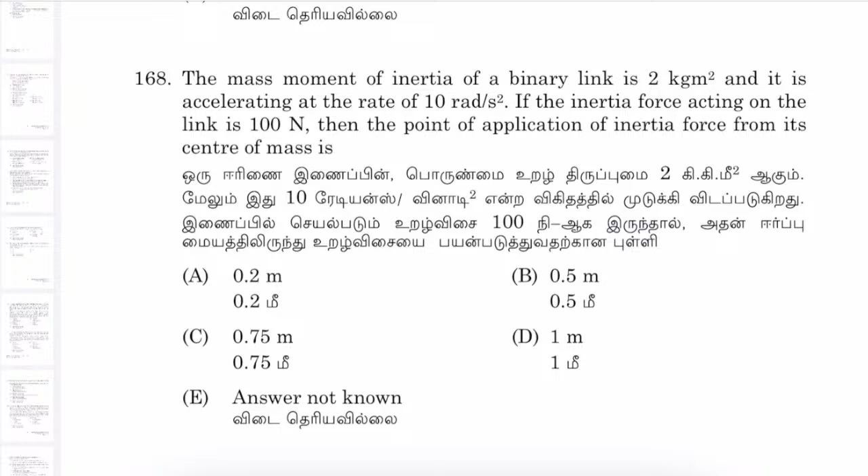169th question. In a damping system, when the mass moves slowly to the equilibrium position, then the damping is known as option A, over damping.

170th question. A vibrating system consists of a mass of 200 kg and a spring of stiffness 80 Newton per mm. The circular frequency of undamped vibrations in radian per second is option A, 20.

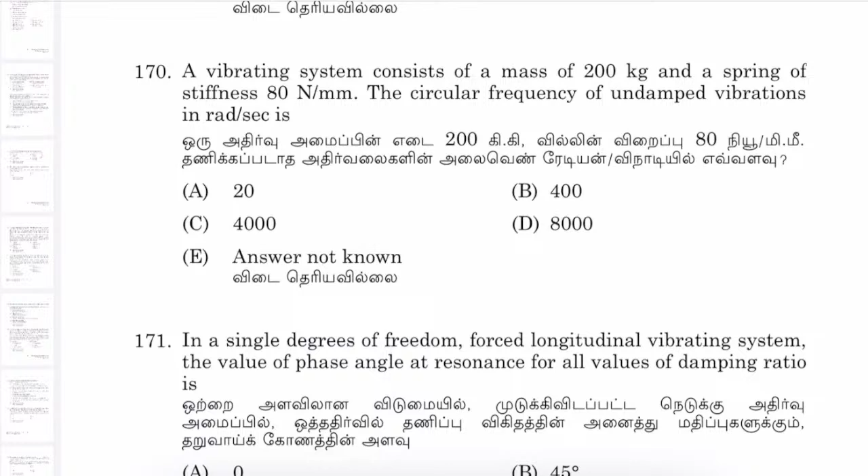171st question. In a single degree of freedom forced longitudinal vibrating system, the value of phase angle at resonance for all values of damping ratio is option C, 90 degree.

172nd question. A gun barrel of mass 1000 kg has a recoil spring stiffness of 1 lakh Newton per meter. If the barrel recoils 2 meter on firing, determine initial recoil velocity of the barrel. Option D, 15 meter per second.

173rd question. The upward and downward parallel forces of equal magnitude exerted by the torque wrench lever is 50 Newton and the total length of the lever is 200 mm. Find the couple exerted by the two unlike parallel forces of same magnitude. Option C, 10,000 Newton mm.

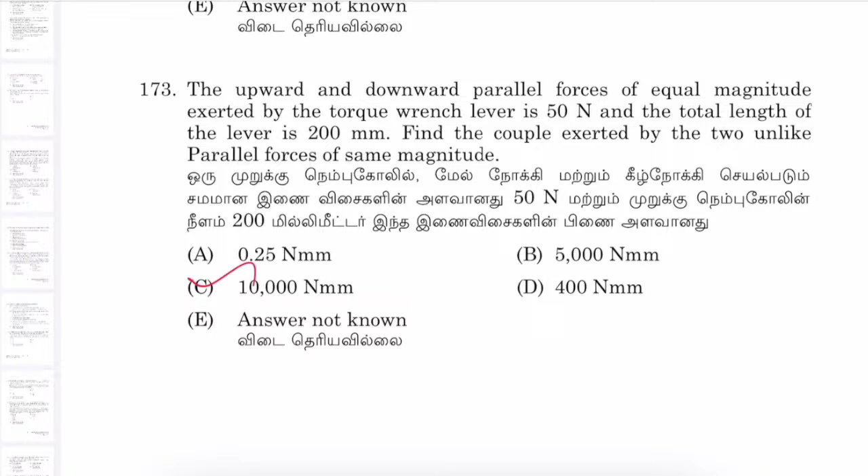174th question. Consider the following statements: the principle of superposition is applied to linear elastic bodies, and the body is subjected to small deformation.

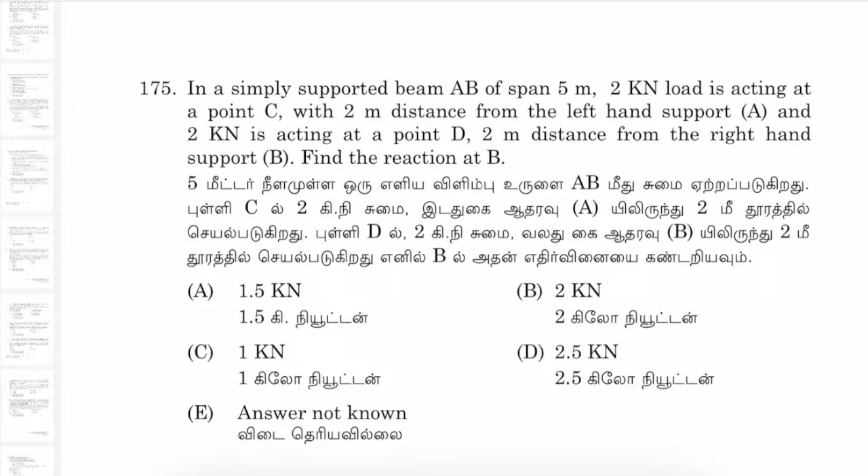175th question. In a simply supported beam AB of span 5 meter, 2 kilonewton load is acting at point C with 2 meter distance from the left hand support, and 2 kilonewton is acting at point D 2 meter distance from the right hand support. Find the reaction at point B. Option B, 2 kilonewton.

176th question. Find the magnitude of the resultant force for the forces F1 equal to F2 equal to 10 kilonewton acting at a point with an angle of 90 degree, and the forces are acting away from the point. Option A, root of 200.

177th question. If a stone is projected vertically up, its time of flight is option C, proportional to its initial velocity.

178th question. A wheel of radius 0.6 meter rolls without slip at an angular velocity of 6 radian per second. The velocity of points P and Q is dash and dash respectively, where P is the point located on the top of the wheel and Q is the resting point on the floor. The angle between P and Q is 180 degree. Option B, 7.2 meters per second and 0.

179th question. A stone is thrown upwards with a velocity of 5 meters per second from a bridge. If it falls down in water after 2 seconds, then the height of the bridge is option B, 9.6 meter.

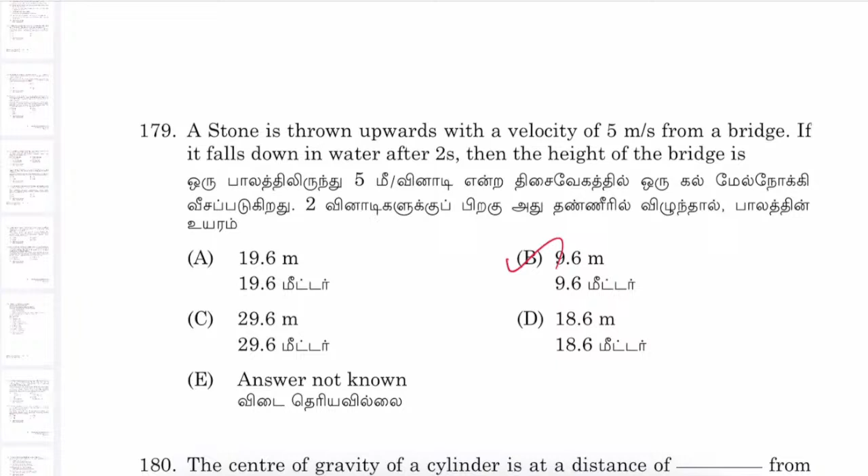180th question. The center of gravity of a cylinder is at a distance of dash from its base. Option A, h by 2.

181st question. Air flows over a plate 0.5 meter long and 0.6 meter wide with a velocity of 4 meter per second. Find boundary layer thickness at the end of the plate. Take gamma equal to 0.15 into 10 power minus 4 meter square per second. Option A, 8.31 mm.

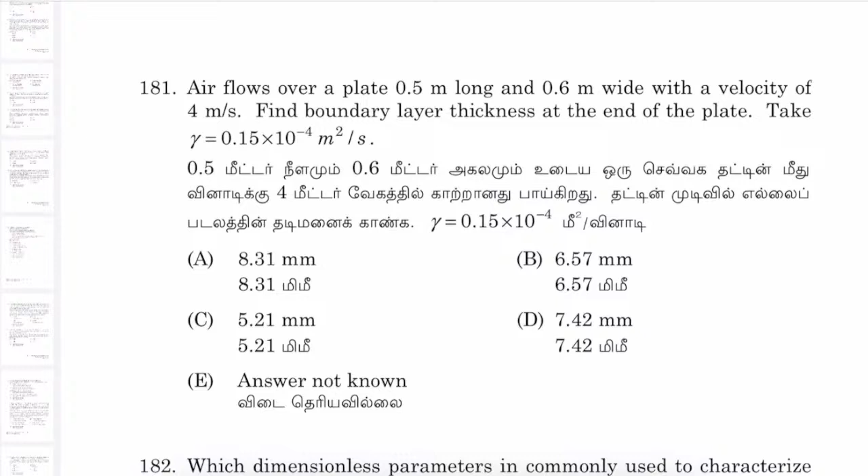182nd question. Which dimensionless parameter is commonly used to characterize the ratio of buoyancy force to viscous force in free convection heat transfer? Option D, Grashof number.

184th question. In natural convection, Nusselt number primarily depends on option C, Prandtl number.

185th question. When TC1 and TC2 are the temperatures of cold fluid at entry and exit respectively, and TH1 and TH2 are the temperatures of hot fluid at entry and exit, and cold fluid has lower heat capacity rate compared to hot fluid, then effectiveness of the heat exchanger is given by option D, TC2 minus TC1 divided by TH1 minus TC1.

186th question. For what value of end temperature difference ratio theta 1 by theta 2 is the arithmetic mean temperature difference 5% higher than the log mean temperature difference? Option B, 2.2.

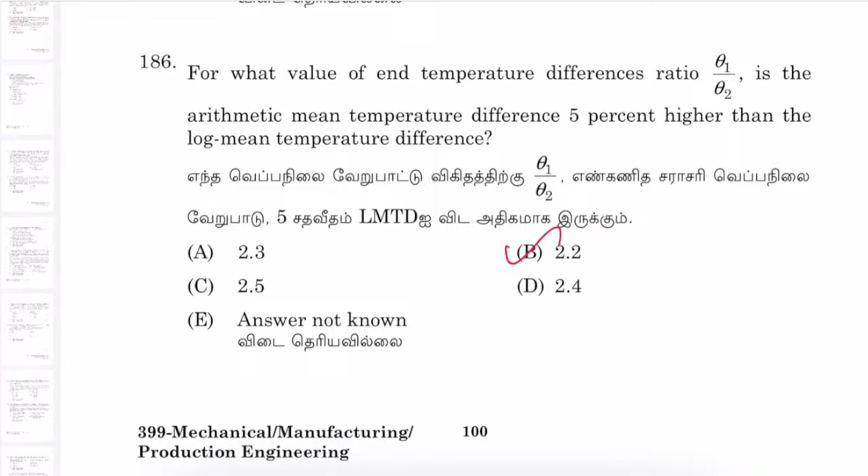187th question. A chemical having specific heat of 3.3 kilojoule per kilogram Kelvin flowing at the rate of 20,000 kilogram per hour enters a parallel flow heat exchanger. The flow rate of cooling water is 50,000 kilogram per hour. The heat transfer area is 10 meter square and the overall heat transfer coefficient is 1050 watt per meter square Kelvin. Find the number of transfer units. Option C, 0.572.

188th question. How is the NTU related to the effectiveness of a boiler? Option C, epsilon equals 1 minus e power minus NTU.

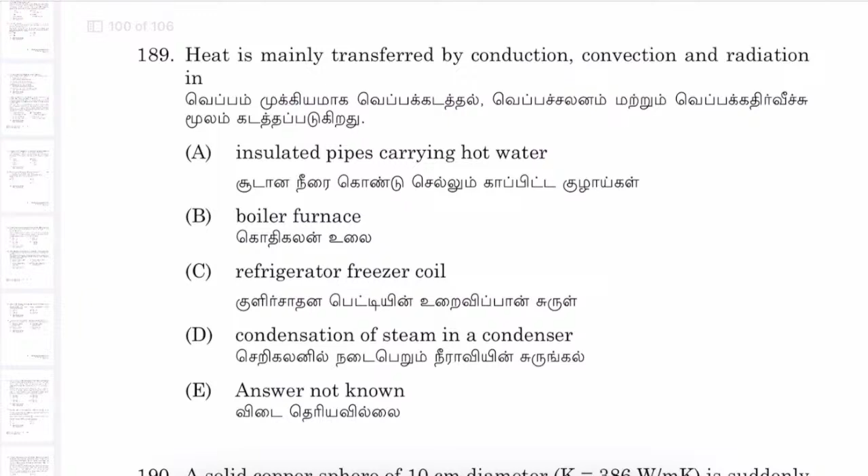189th question. Heat is mainly transferred by conduction, convection and radiation in option D, condensation of steam in condenser.

190th question. A solid copper sphere of 10 cm diameter is suddenly immersed in a well-stirred fluid maintained at uniform temperature. The heat transfer coefficient between the sphere and the fluid is h equal to 200 watt per meter square Kelvin. Determine the Biot number. The 190th answer is 7.41 into 10 power minus 3.

191st question. A hot plate 1 meter into 1.5 meter is maintained at 300 degrees Celsius. Air at 20 degrees Celsius blows over the plate. If the convective heat transfer coefficient is 20 watt per meter square degree Celsius, calculate the rate of heat transfer. Option A, 8.4 kilowatt.

192nd question. What is the unit of thermal resistance? Option C, Celsius per watt.

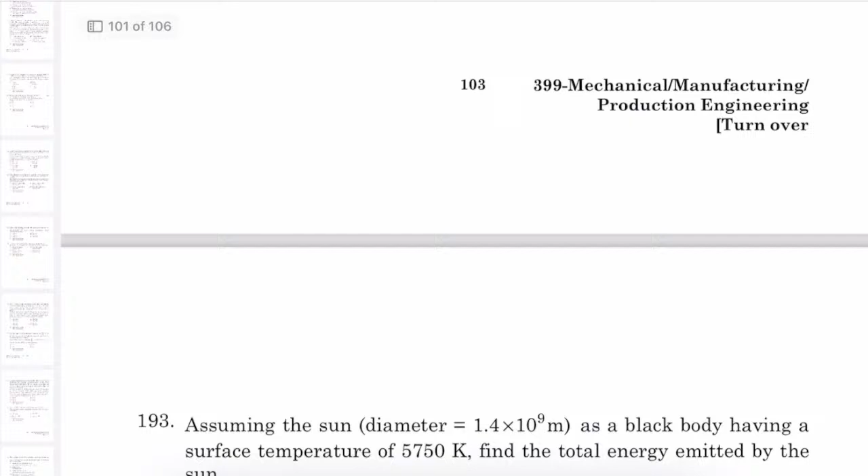193rd question. Assuming the sun as a black body having a surface temperature of 5750 Kelvin, find the total energy emitted by the sun. Option A, 4.513 into 10 power 25 watt.

194th question. Planck's law provides the foundation for which branch of physics? Option D, quantum mechanics.

195th question. How does the reflectivity of a white body compare to that of a black body? Option D, white bodies have higher reflectivity than black bodies.

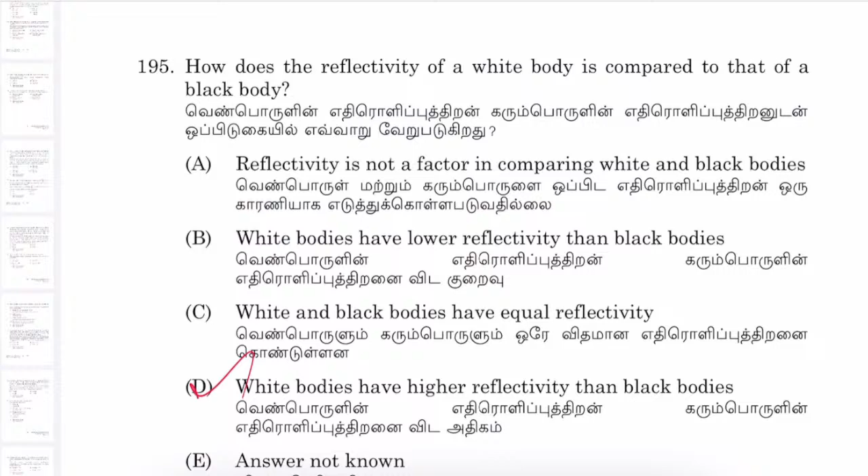196th question. Calculate the maximum wavelength for an industrial furnace in the form of a black body emitting radiation at 2500 degree Celsius. Option D, 1.045 micrometer.

197th question. Most of the correlations in heat transfer can be applied to mass transfer under similar conditions by replacing Nusselt number by option A, Sherwood number.

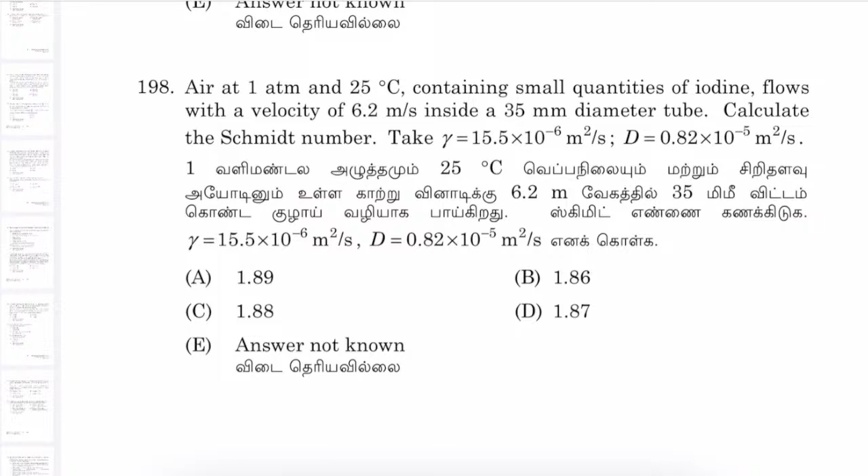198th question. Air at 1 atmosphere and 25 degrees Celsius containing small quantities of iodine flows with a velocity of 6.2 meter per second inside a 35 mm diameter tube. Calculate the Schmidt number. Option A, 1.89.

199th question. How does the analogy between heat and mass transfer aid in engineering calculations? Option C, it provides a method to estimate mass transfer coefficients from heat transfer data.

200th question. What does the Lewis number represent in mass transfer? Option B, ratio of thermal diffusivity to mass diffusivity.